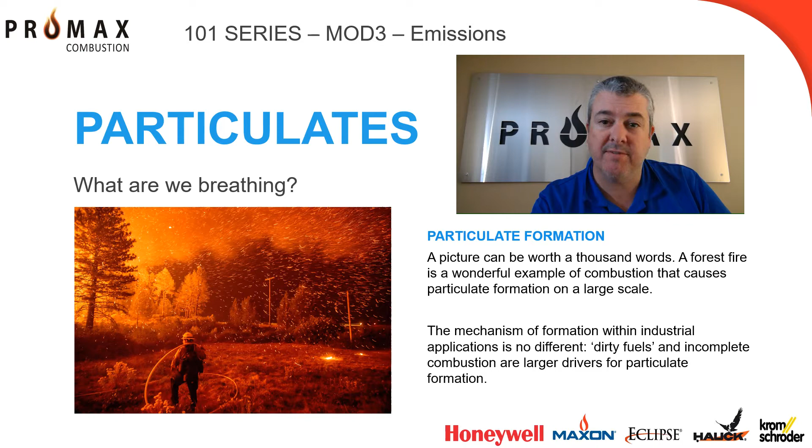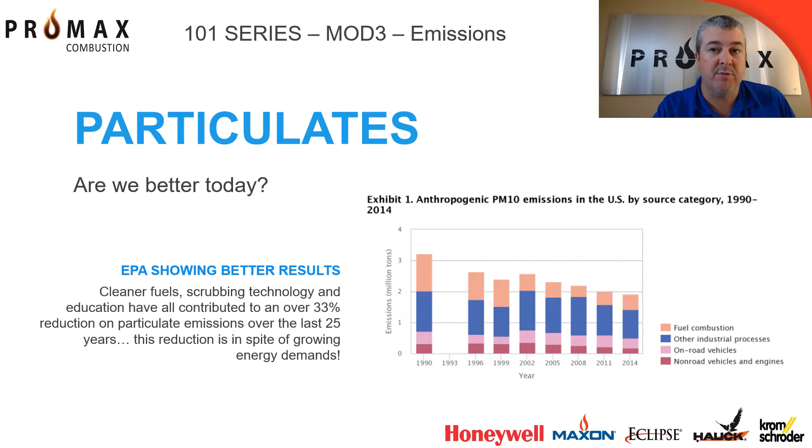Societal conversion to cleaner fuels and advancements in scrubbing technologies have all helped lower the amount of particulates entering the atmosphere. Since 1990, we have witnessed a 1/3 drop in measured particulate concentrations, even with the boom in energy consumption we have witnessed around the world.

Before discussing unburned volatiles, it is important to understand the impact of the greenhouse effect. The thin atmospheric layer that envelopes the Earth can be seen as a blanket. The Earth absorbs the sun's rays during the day and heats up. After the sun sets, the Earth emits this heat back into the atmosphere. Greenhouse gases have the effect of making this blanket thicker and even more effective at retaining the heat emitted overnight. This ultimately causes average global temperatures to rise with yet undetermined environmental impact.

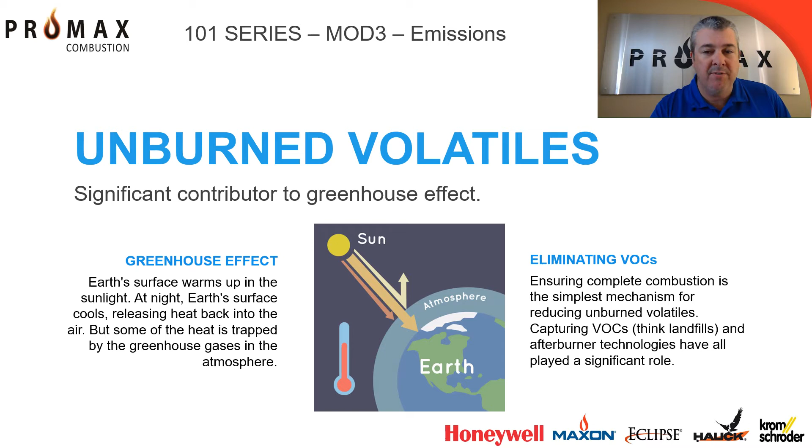Unburned volatiles are among the worst greenhouse gases. The first category of unburned volatile is from unburned hydrocarbons. A simple burner tuning is normally enough to eliminate this source almost entirely. Other volatiles can be emitted from industrial processes. Afterburners are an effective tool at eliminating this source. Landfill capture stations and minimizing system vents are all proving effective at eliminating unburned VOCs from entering the atmosphere.

Sulfur, carbon, and nitrous oxides have become the modern-day compounds at the forefront of emission standards. This is for very good reason, as they all contribute not only to the greenhouse effect, but also acid rain and smog formation. Sulfur dioxides, and trioxides to a lesser degree, are compounds that are produced directly from fuel-bound sulfur molecules. Little can be done to eliminate them once they are formed.

Expensive scrubbing technology is available, but at very cost-prohibitive levels. The simplest solution is to use fuels like natural gas and propane that have much lower sulfur concentrations than traditional fuel oils. Condensing of sulfur dioxide causes severe corrosion in industrial equipment. It is also one of the main causes of acid rain.

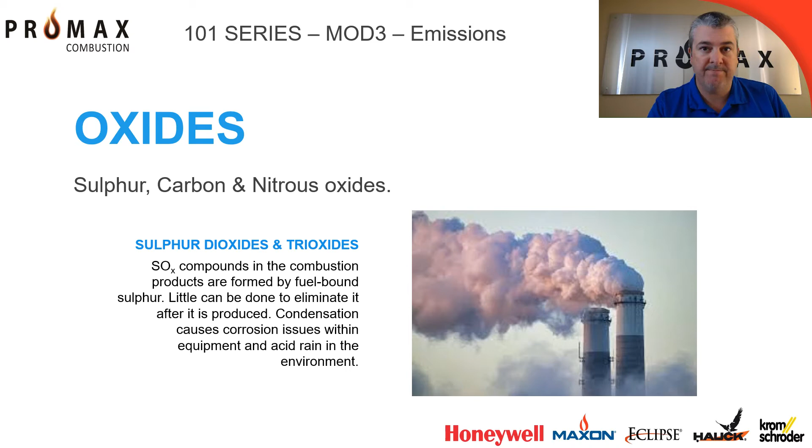Moving away from sulfur dioxides, the next important oxide group would be carbon monoxide. Known as a silent killer, carbon monoxide is a colorless, odorless, transparent molecule that is highly effective at irritating our eyes and lungs. Asphyxiation is a severe risk when dealing with carbon monoxide, even in low concentrations.

Although sometimes carbon monoxide is generated from the process, it is normally a very strong indicator of incomplete combustion. Governments have implemented strong regulation regarding its acceptable emission levels because carbon monoxide formation is highly controllable. There are three major ways to help eliminate the generation of carbon monoxide within a given combustion system. 1. Burn lean. 2. Burn hot. And 3. Keep the combustion products in a hot combustion chamber for as long as possible.

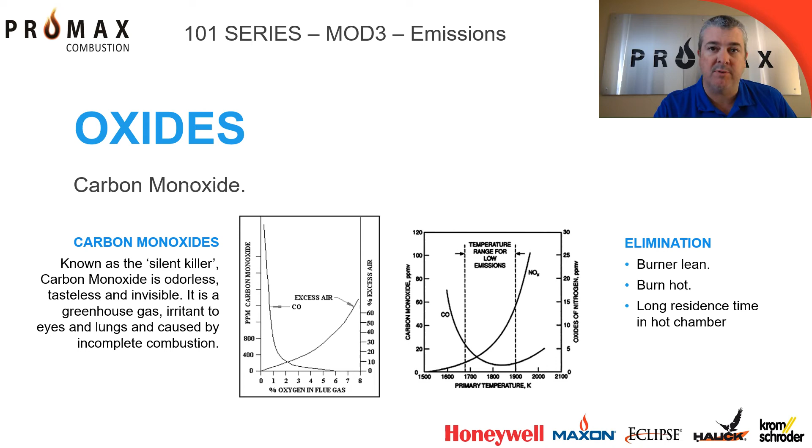We will discuss carbon dioxide as an emission only because it is the predominant greenhouse gas. It is all our responsibility to be as conscientious as possible regarding the environment. Burning hydrocarbons will always result in the production of carbon dioxide and water. The chemistry is what the chemistry is. The only way to eliminate carbon dioxide is to eliminate the carbon from the fuel itself. This is why alternative fuels and efficient use of the fuels we consume is essential to reduce our overall environmental impact.

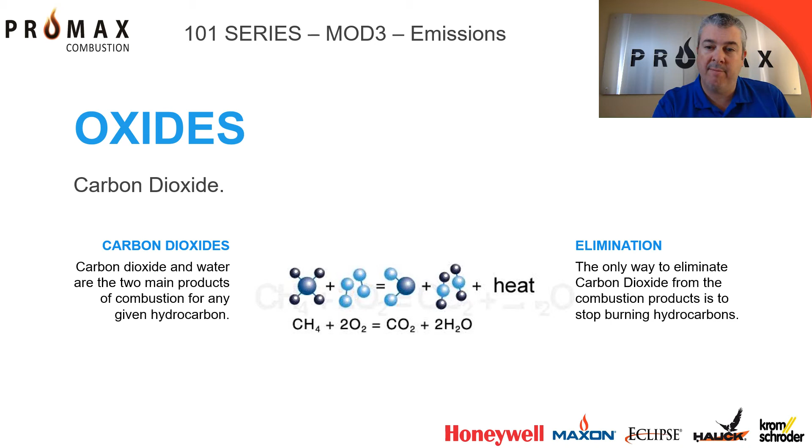No discussion about environmental oxides would be complete without the notorious nitrous oxide family. Both nitrogen monoxide and nitrogen dioxide are grouped together under the NOx banner that is stated repeatedly in industrial combustion. NOx generation has become extremely important in modern society, as it is not only an eye and lung irritant, but smog formation in all major cities is a visual reminder of its impact on all of us. The gray-red cloud that hangs over most large cities is a direct byproduct of NOx molecules in the atmosphere.

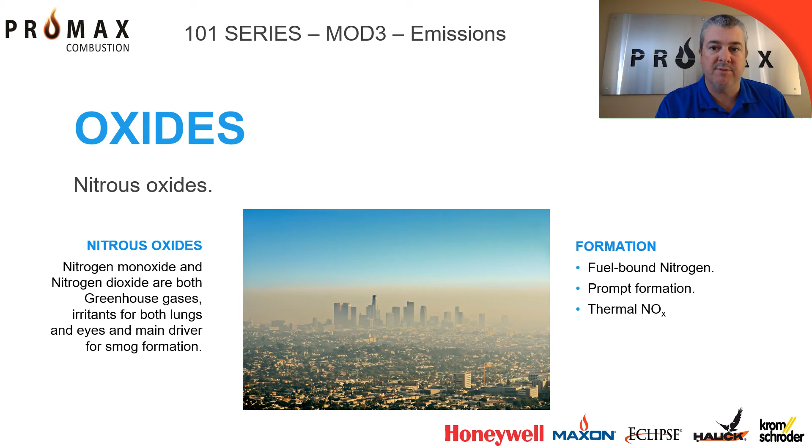NOx is formed via three independent mechanisms. 1. Fuel-bound nitrogen. 2. Prompt formation. And 3. Thermal mechanisms, also known as the Zeldovich mechanism. Of the three mechanisms causing the formation of NOx during the combustion process, the first two are minor in nature when compared with the Zeldovich mechanism. Fuel-bound nitrogen NOx formation can only be mitigated by using fuels that do not contain nitrogen. Moving away from coal and other heavy oils can significantly reduce this minor contributor even further.

Prompt NOx formation comes from the bonding of nitrogen with hydrocarbon-free radicals. This mechanism is only of concern in sub-stoichiometric systems and is of limited concern in modern-day furnaces.

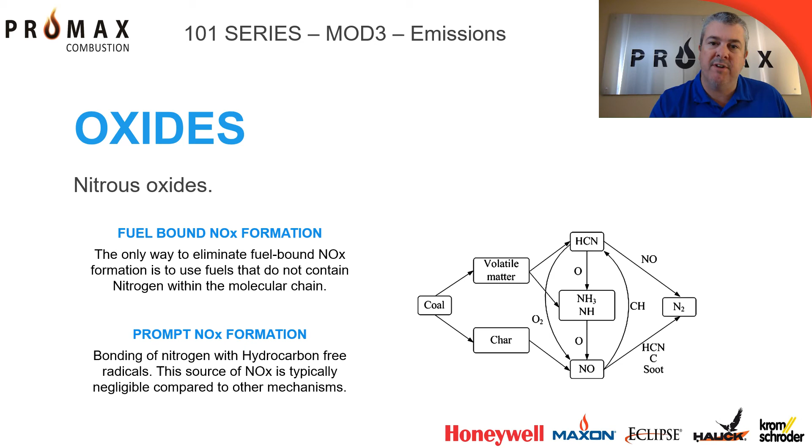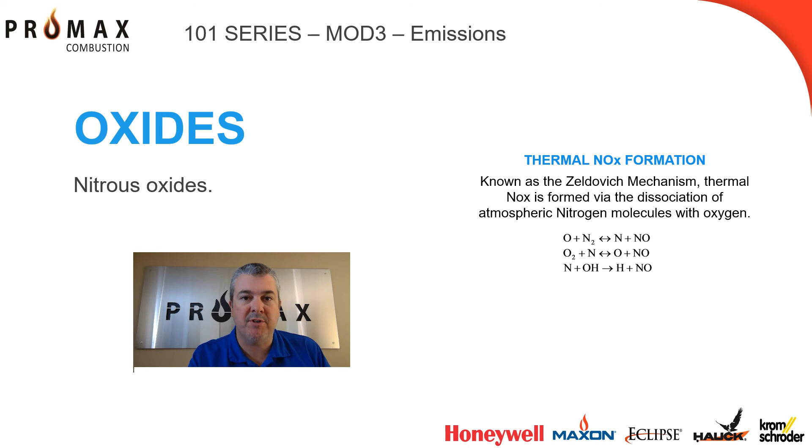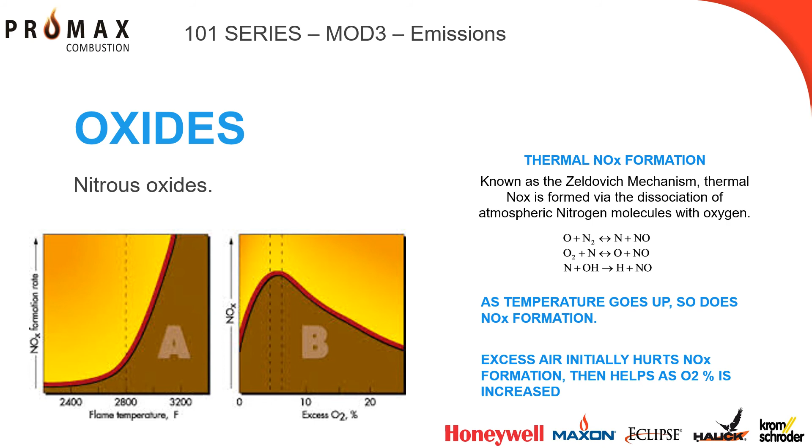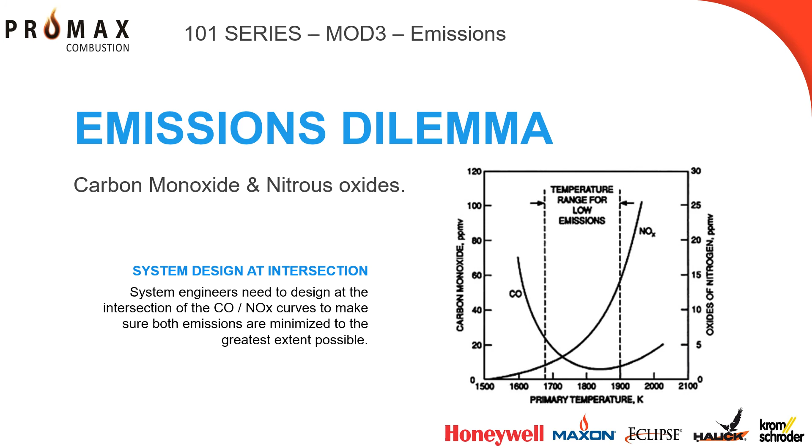As we have already learned, most regulatory bodies are most concerned with carbon monoxide and NOx emissions. Unfortunately, we have also learned that what helps lower carbon monoxide emissions ultimately increases NOx emissions. The curve at right clearly demonstrates the emissions dilemma facing modern burner designs. One needs to burn hot to minimize carbon monoxide production, but this dramatically increases NOx formation. So, what can be done?

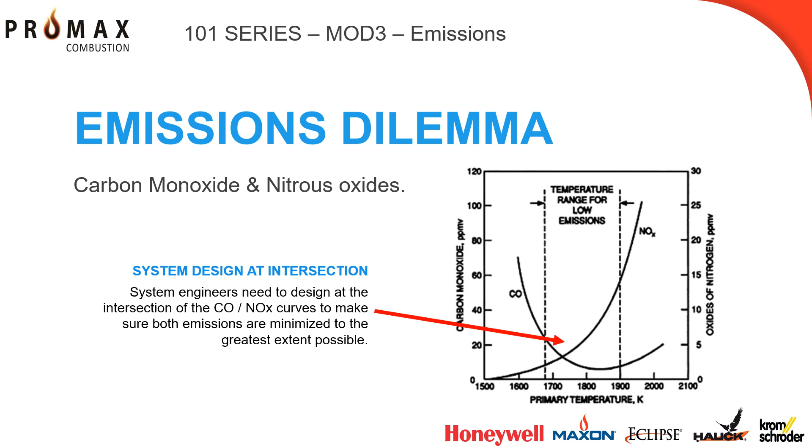Tight control of the fuel-air ratio using fully metered systems, higher gas and air pressures increasing mixing power, injecting of secondary or tertiary air, increasing dimensions, both diameter and length, of the combustion chambers. These are all tools used by the modern combustion engineer to find the Goldilocks zone for emissions.

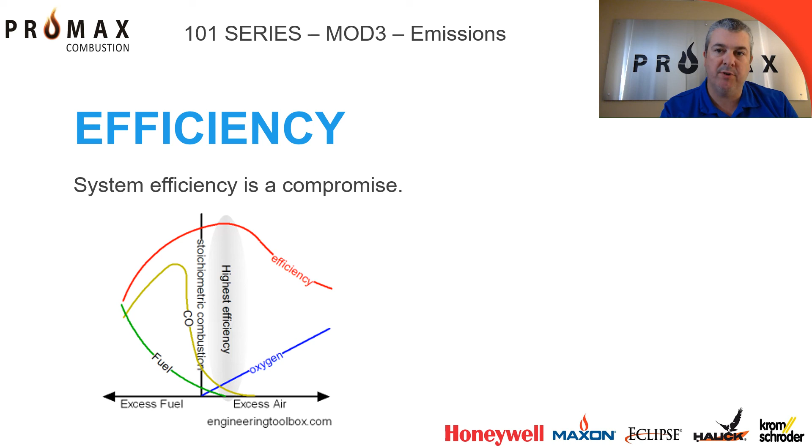As with the compromise between carbon monoxide and NOx formation, overall system efficiency is also a compromise between two competing forces. For thermal efficiency, we want to burn hot, but in order to minimize emissions, burning hot is not always the best solution. Without getting into the complex mathematics regarding system efficiencies, typical industrial combustion systems run most efficiently at slightly lean combustion ratios. We would typically see systems with approximately 15% excess air as the target for optimum operation. This point tends to minimize carbon monoxide and NOx formation while maintaining thermal efficiencies as high as possible.

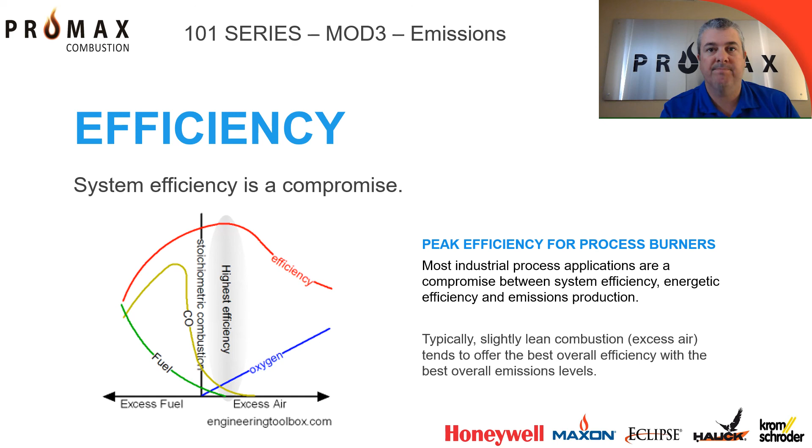So, what have we learned? Quebec regulation stipulates limits of 400 ppm for carbon monoxide and 50 ppm NOx emissions for industrial applications. Emissions can be divided into three major groups: particulates, unburned volatiles, and oxides. We know that carbon monoxide is reduced at high temperatures. We know that NOx is increased at high temperatures. And we know that efficiency is a compromise between responsible energy use and environmental emissions.